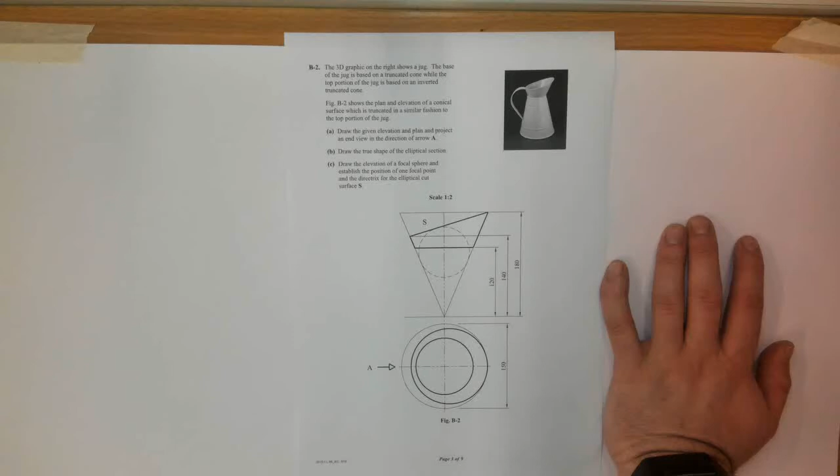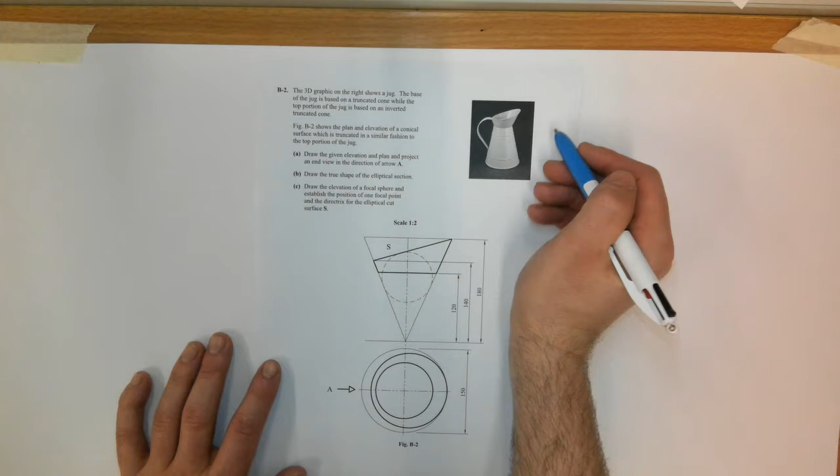Okay, so welcome to the 2015 mock exam on DCG, and it's doing conics, right? So we have a 3D graphic of a jug. So there's a cone here that's truncated, so the top cut off, and then the top portion is a cone upside down that's truncated there and there. So it's cut at an angle, cut horizontally.

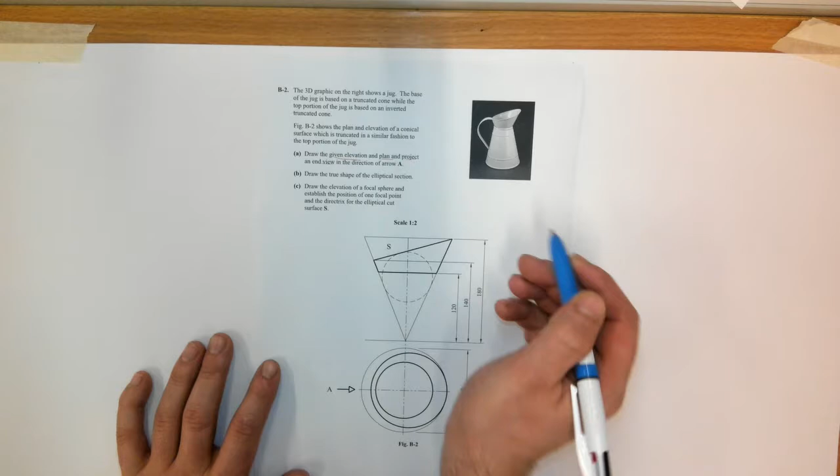So B2 shows a plan and elevation of a conical surface which is truncated in a similar fashion to the top portion. Part A. Draw the given elevation and plan and project an end view in the direction of arrow A. So if the end view or the end elevation is done this way, the end elevation will be drawn on the right of the elevation.

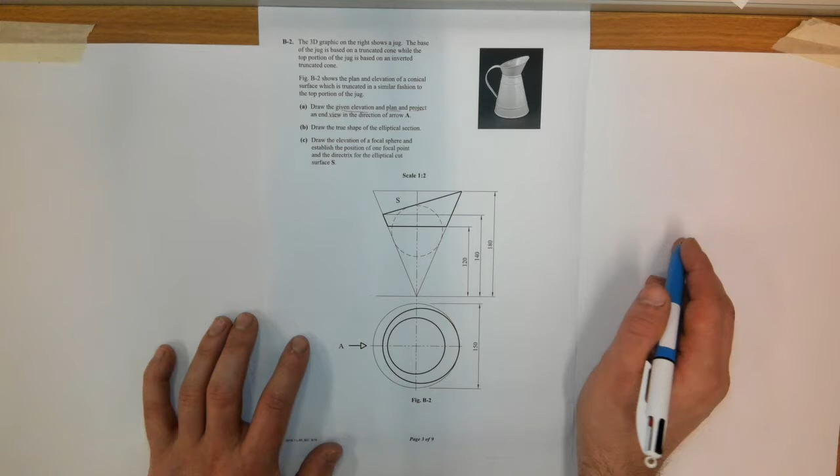Now what's important to note is the black circle here on the inside represents this line here in elevation. It's an edge of the circular surface. If you cut a right circular cone, inverted or upright, any horizontal section will produce a circle. So that's a circle there. Now this is truncated, so in plan that's going to appear as an ellipse.

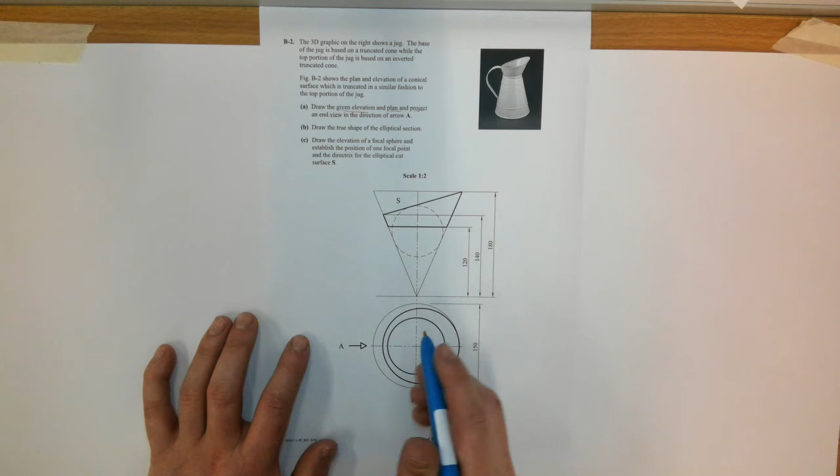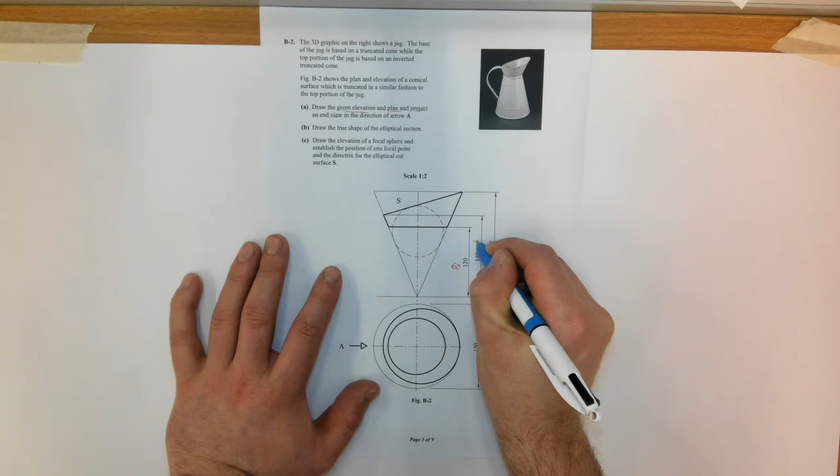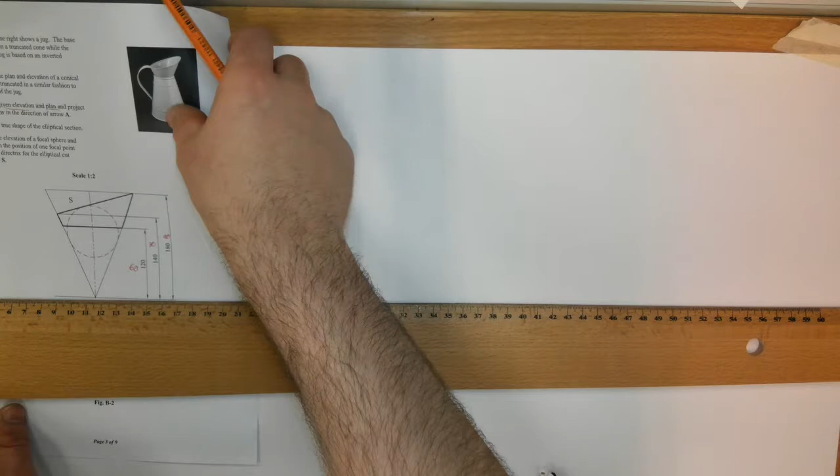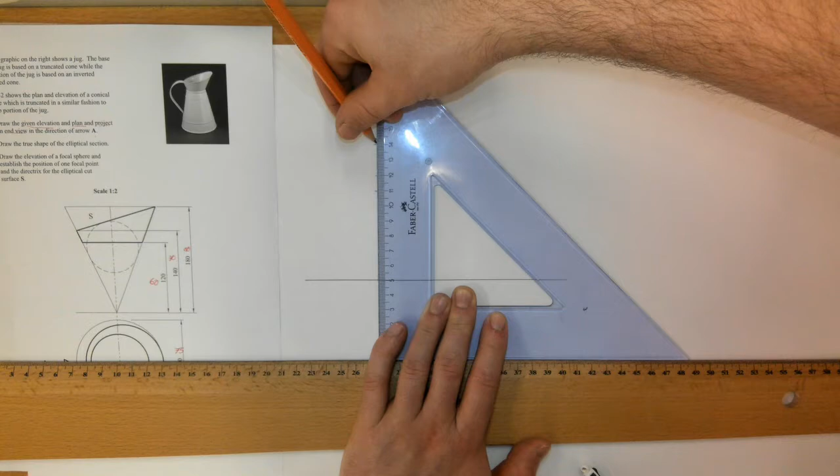So we'll have to draw that, and we'll draw it using elements. So I'm going to get started. A reminder, it's scale 1:2. So 60, 70, 90, 75. Okay, so I'll get my XY line here now. One moment. Okay, so 90 up, this is max height. Then we have 60 up as well. Okay, and then 70 up from the XY line, and center here, there.

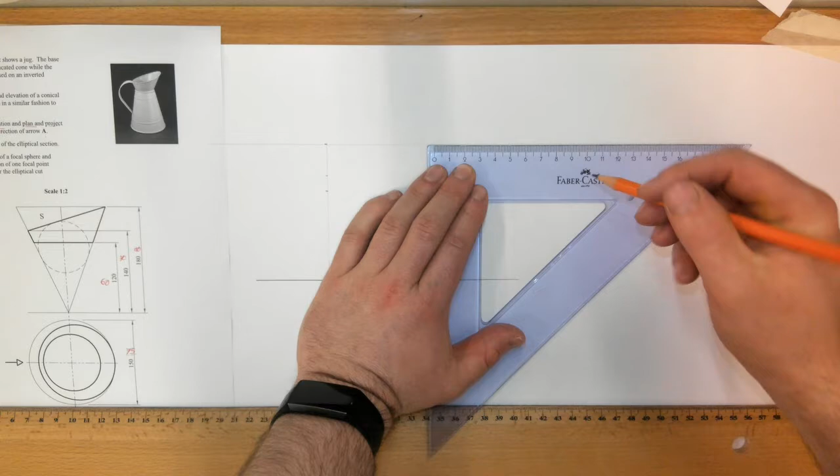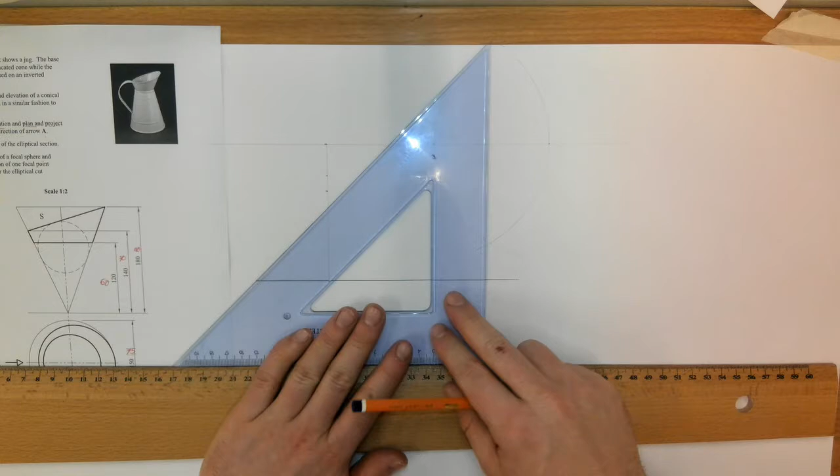Okay, so I can go across. It says in plan that the diameter is 150, so that's 75 after the scale. So how am I going to get that stepped equally? So I'm going to just on a light line mark 75. I'm going to take my compass, set my compass to the length of the line and bisect it. So it's just light construction work. So there's half of this 75 there. So I can take that and step it either side. Now I can get to business.

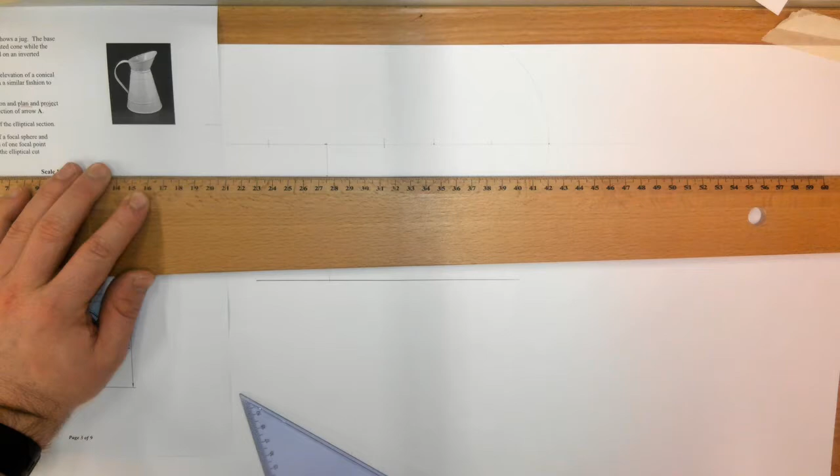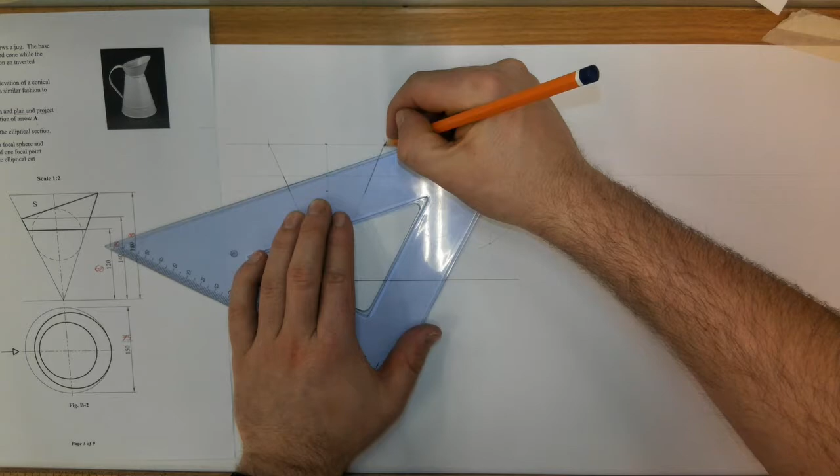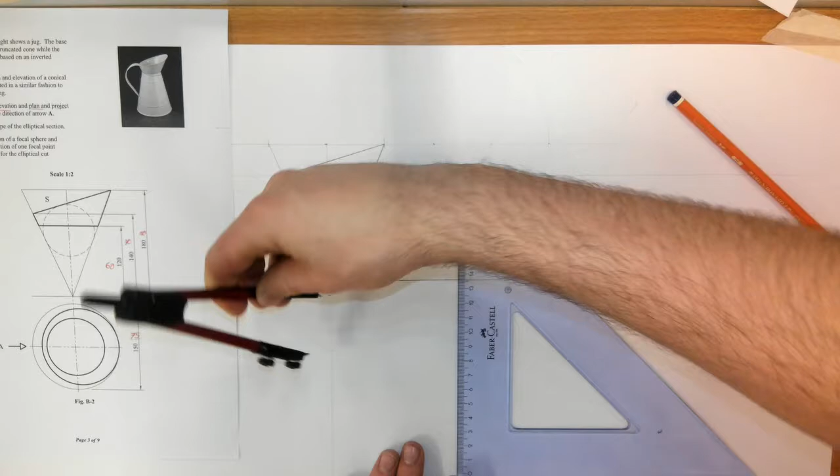So I'm just going to draw a light line here, take my set square now, join these points together. Same then over here. Connect then these here. Connect those. Now, the plan view. So there I can start my plan view. So I'm drawing in the outline of the cone. Now to get the inside black circle, I'm going to bring my compass up here, take the distance there, bring it down here, and that's the radius of the circle in plan.

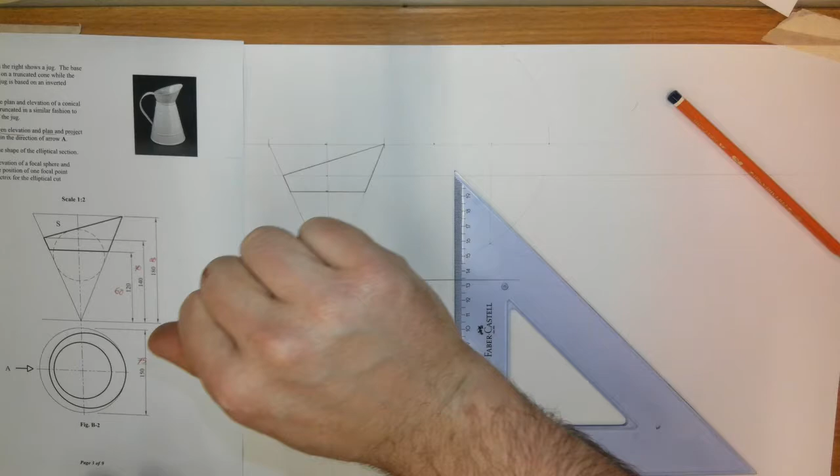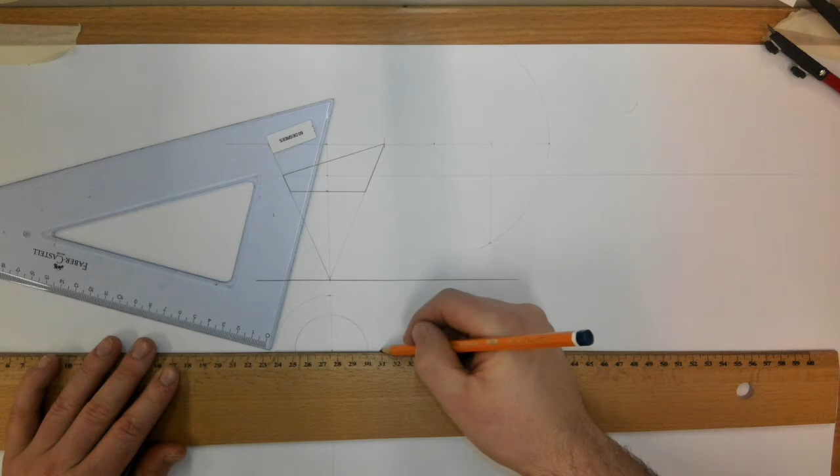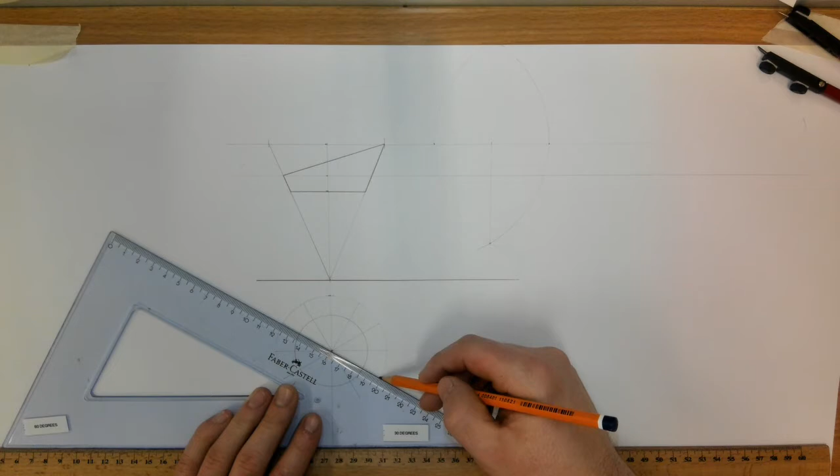Right. Now I need to get the elliptical section here in plan. So what I'm going to have to do is divide my cone up in plan into elements. Okay, now 0, 1, 2, 3, 4, 5, 6, 7, 8, 9, 10, 11. Right, so let's bring them up to elevation.

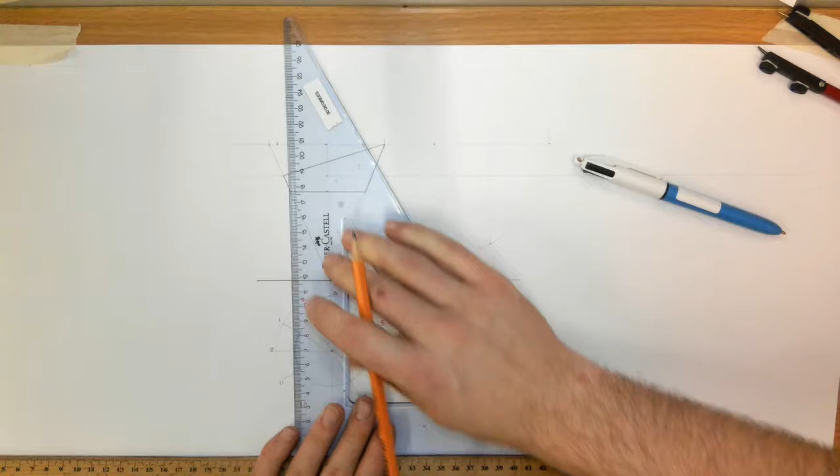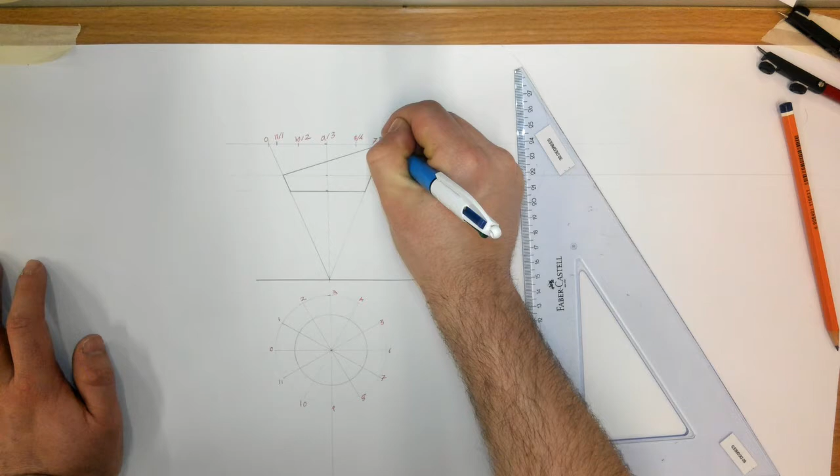So I'm marking those points in elevation, and they're going on the base of the cone, so the top essentially. And then I'm going to label them 0, 11/1, 10/2, 9/3, 8/4, 7/5. Okay, if they join to the apex in plan, they join to the apex in every view. So I'm going to join them lightly to the apex.

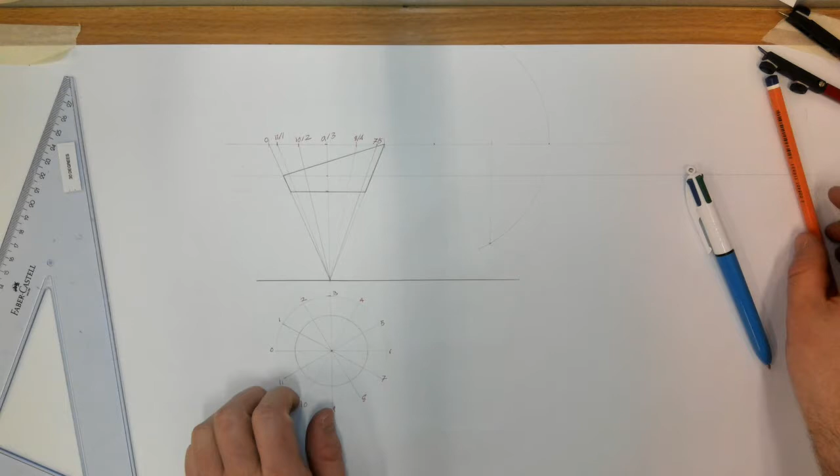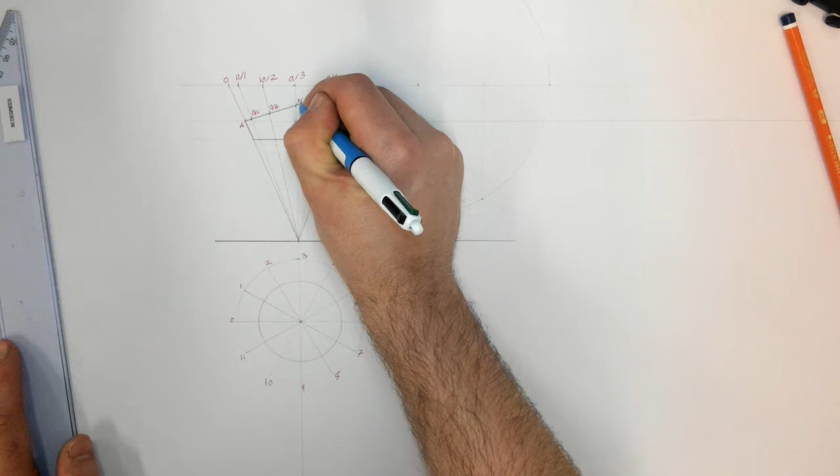Now, where these generators cut the cone, that's points on the elliptical cut surface. Okay, so here we have a point there A, then we have B and C, D and E, F and G, H and I, J and K, and L. So we need to bring those points down to plan, right?

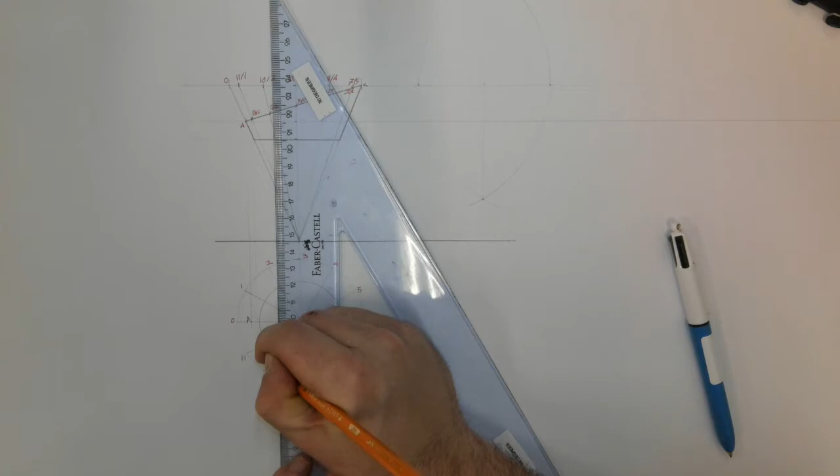So A is on the line 0 to the apex, so there's point A. B and C are on the lines 11 to the apex and 1 to the apex, so there's B and C. D and E are on the lines 10 and 2, so that's D, that's E. Okay, F and G now are going to be hard to get, so what we're going to use is a horizontal section, right?

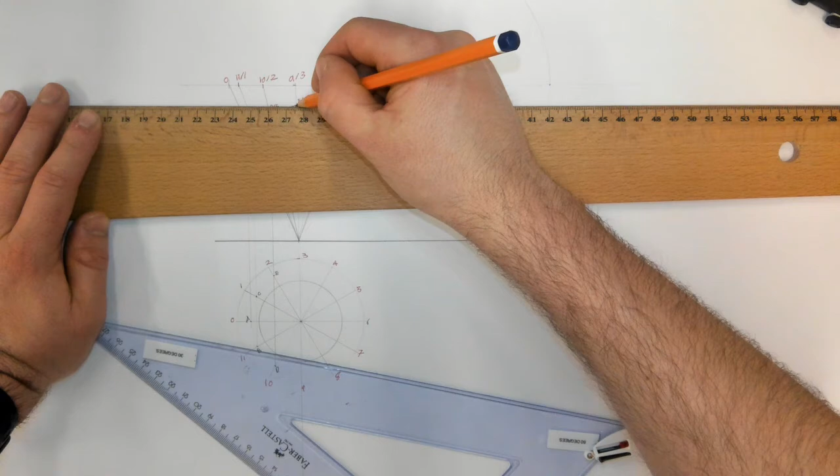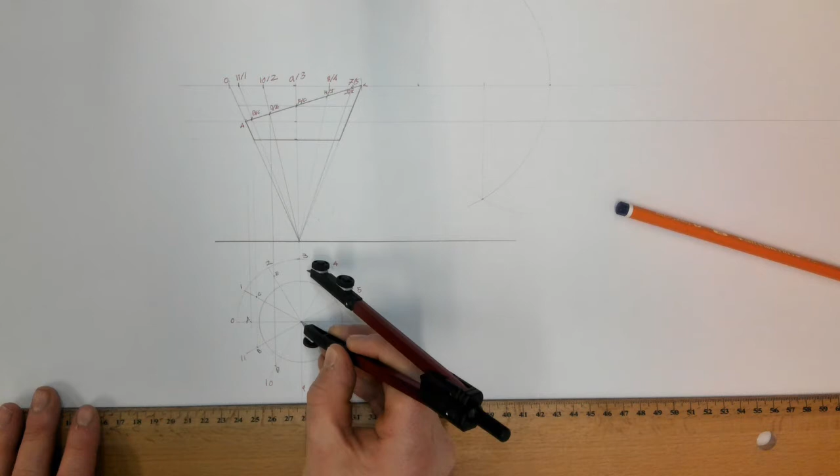Horizontal sections of a right base cone, whether it's upright or inverted, produce circles. So if I draw a horizontal line there cutting through the cone, it's going to produce a circle. So if I take my compass here now, having set to that radius, there's going to be G and there's F.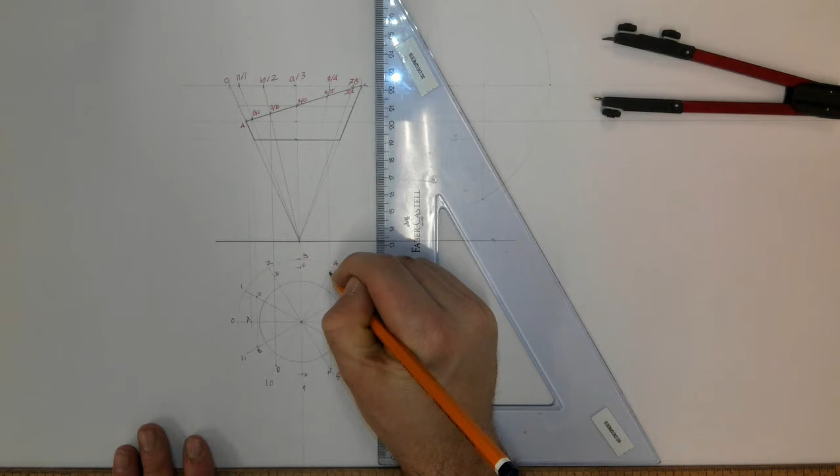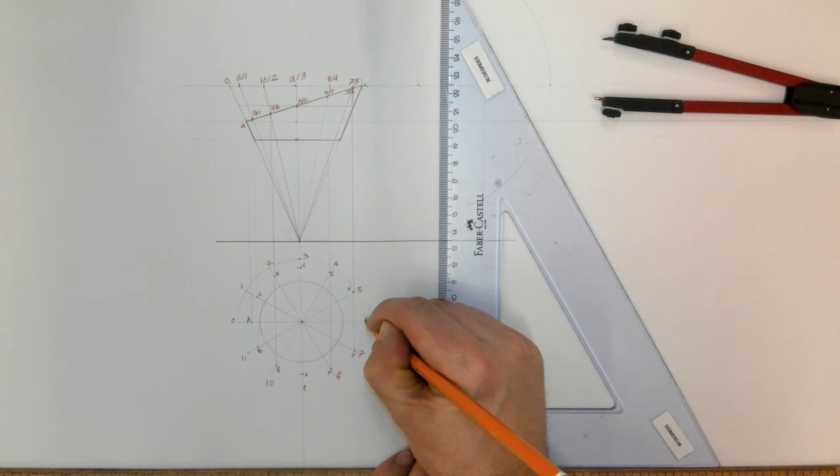Now we want to get H. H is on the line 8 to the apex, and I is on the line 4 to the apex, so 4 to the center. Now J and K, so there's J and there's K, and then point L is there. Right, we can freehand sketch them in, but I'm going to sketch it in later.

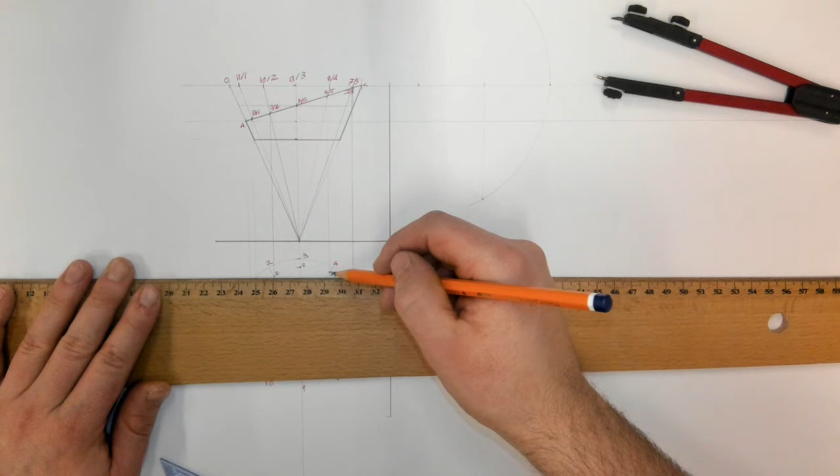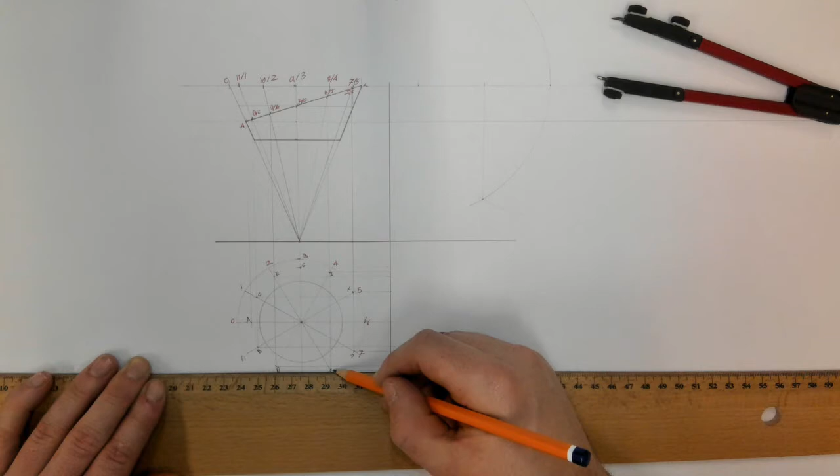So what I need to do next is I need to draw the end view. So I'm going to draw a vertical line here for the YY line. I'm going to bring each of the points across. So all the letters, bring it across until it hits the YY line. Now, where it hits the YY line, we can do our 45 degrees.

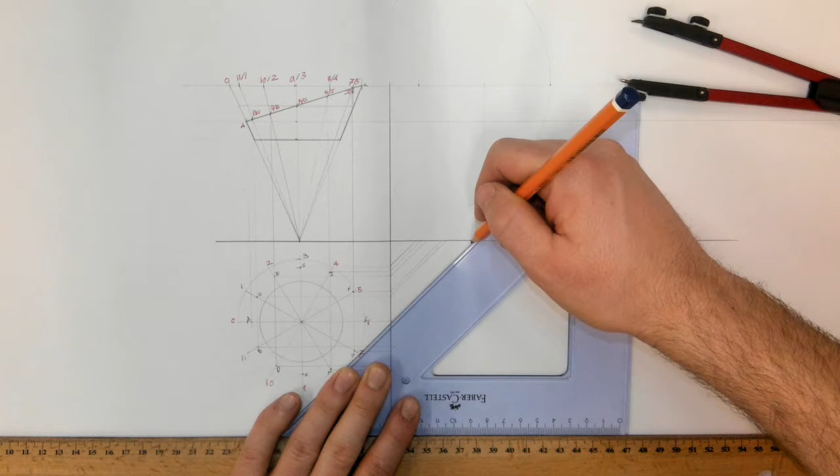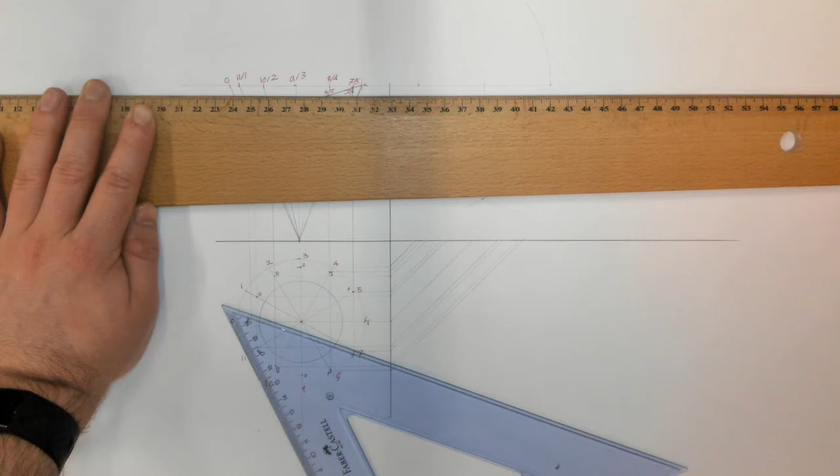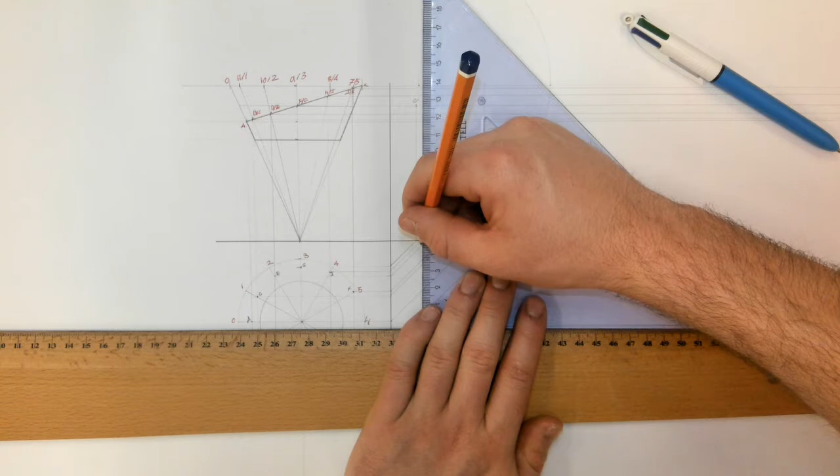Now I'm going to bring all these lines straight up in a moment's time. But first I'll just bring the points from elevation across. So the letters in elevation, just bring them straight across. Okay, I'm going to bring up point G. So there's G. I'm going to bring up point I. There's I. Okay, I'm going to bring up point E. There's E. You've got to be careful that you label these right.

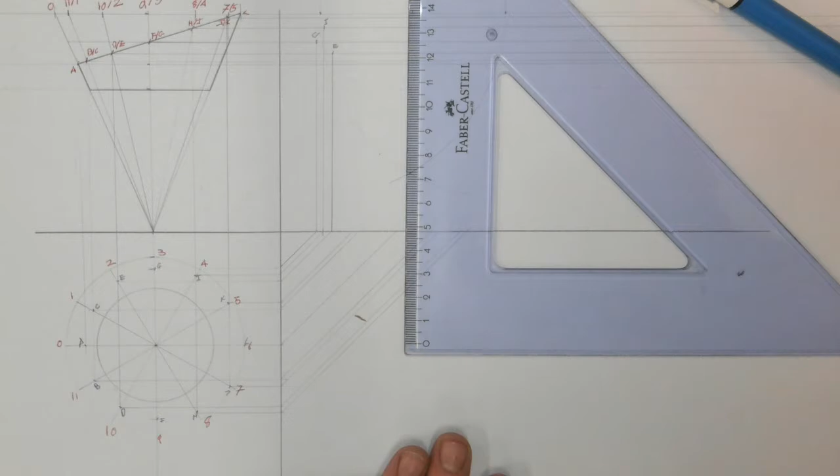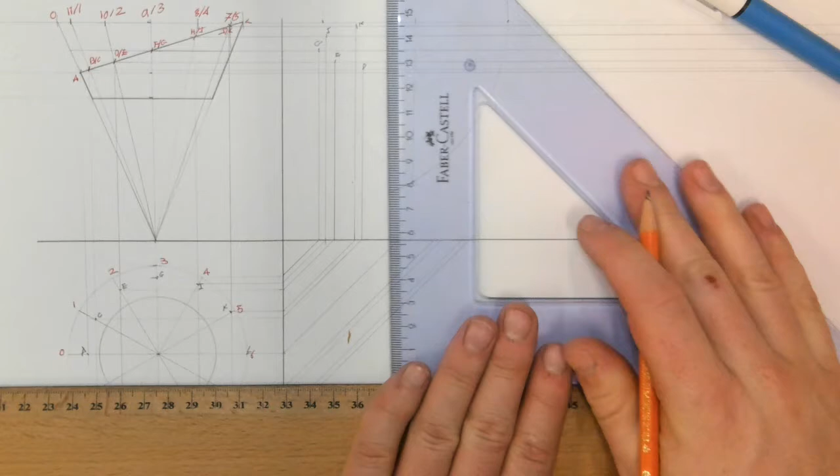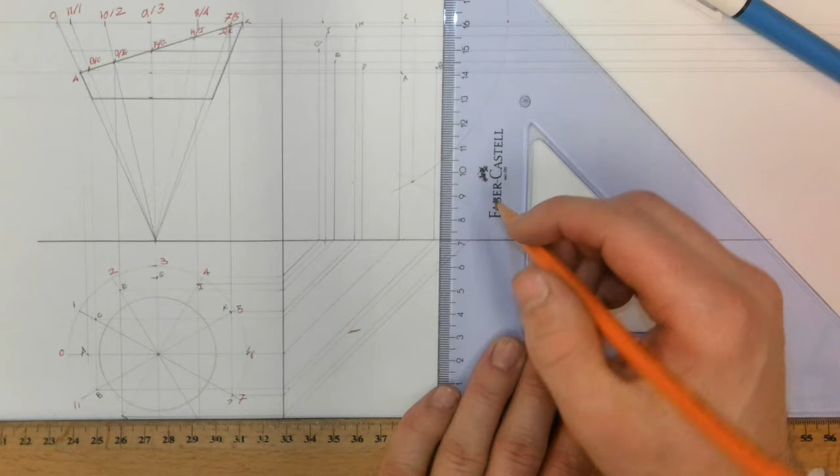Now I'll zoom in a little bit. So point K. There's K. So there's A and, not point C, A and L. There's point L. Right, then B. Okay, J. So yeah, that was J. Point D.

Point H, over and up. And then point F I have yet to do. So over and up from point, not H, F rather, sorry. So now I have one of my letters in the wrong position, this one here that I labeled. So I need to go down and track it back. So that was point D. D should have been, that's D there. And then this is point F.

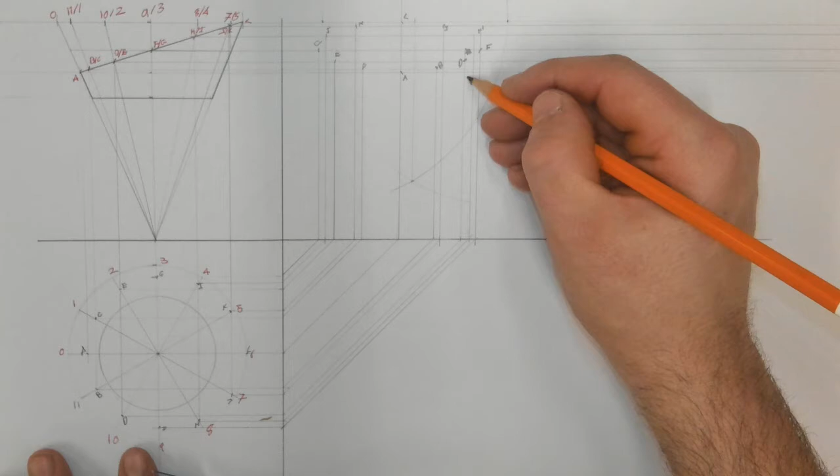Okay, and do I need any other points? Good, then I have I, H. Need to do H, forgot to do H. So up, across there, and then here's point H. Right, I'm going to pause the video and sketch all of these in a moment's time.

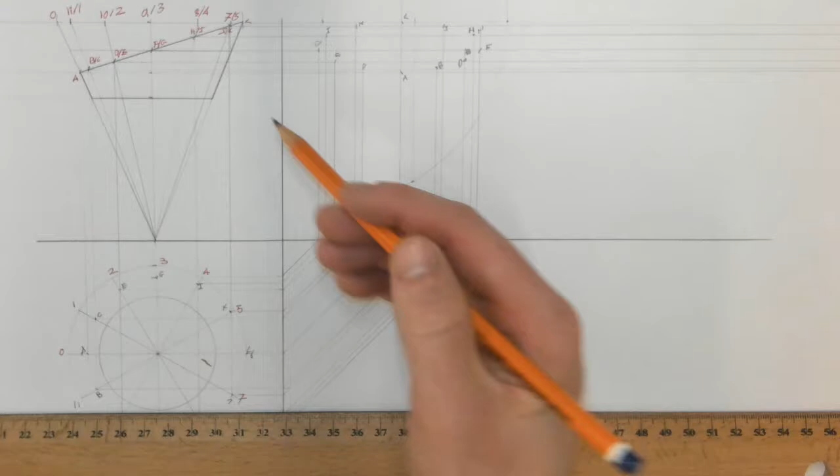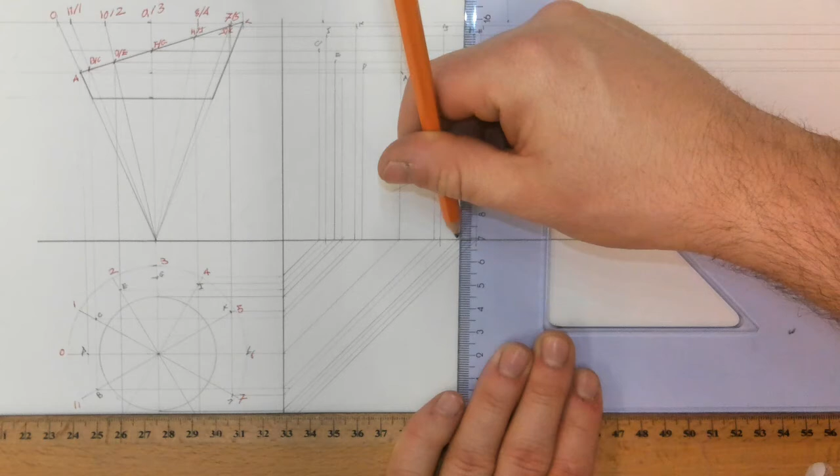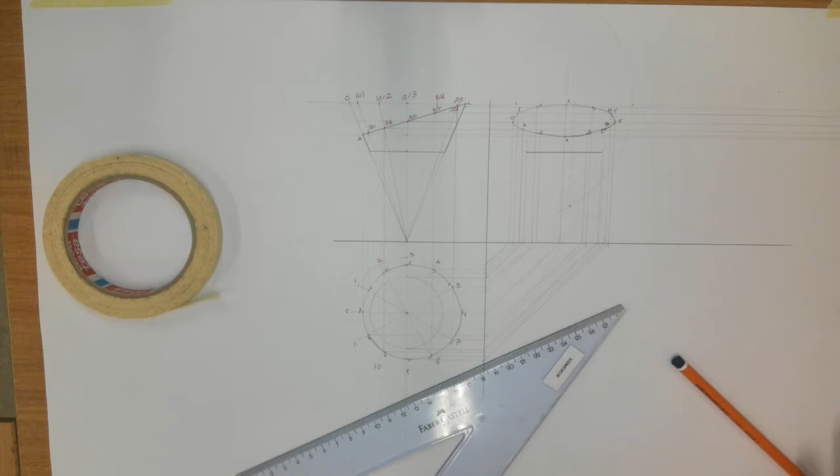Now just to do this bottom here, I'm going to bring the circle across the XY line, up, and same here. So up from it. There we go. They'll be heavy in between them. Now I'm going to pause and sketch them in. So I have them sketched in, and I need to join G to this point here and F to this point here. Now the next part of the question says draw the true shape of the elliptical section.

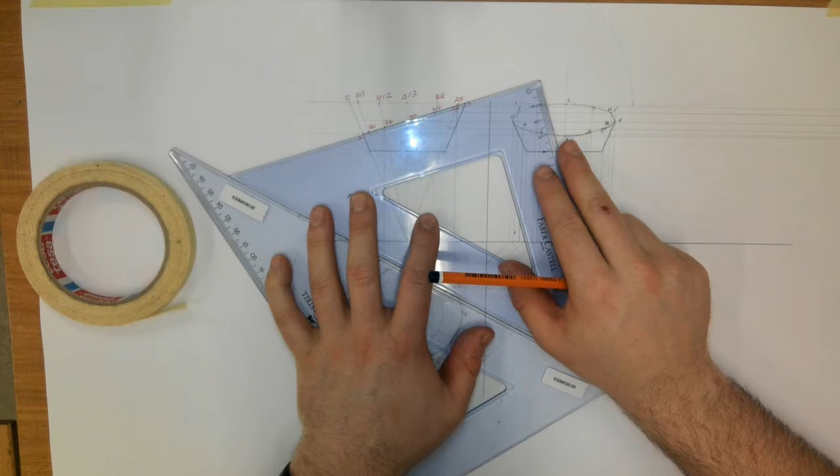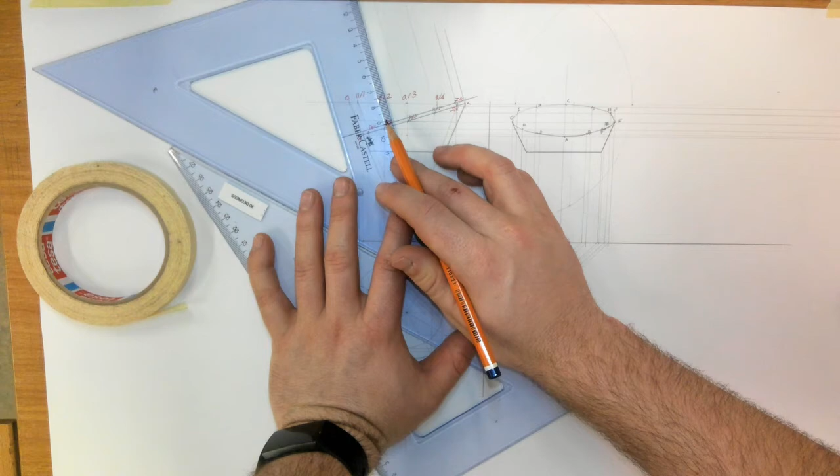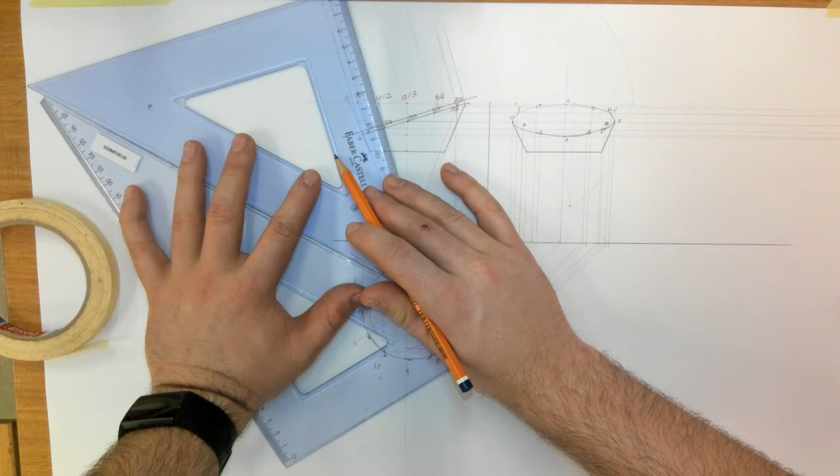So I'm going to look perpendicular to the edge of the elliptical section. It'll be tight for space here, and I'm going to draw in my X1Y1 line right here, very close to it. Now I'm going to project perpendicular to the X1Y1 line from each of the points. This is essentially an auxiliary plan because it's projected from the elevation, and I'm going to take my distances from the X1Y1 line down to plan. Okay, so I can get started on that.

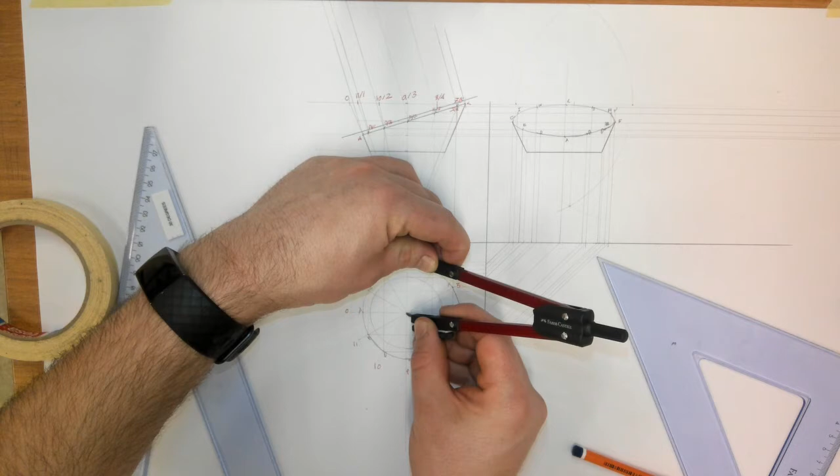Right, now, because I'm tight for space, I'm going to draw a datum line. So I'm just going to draw a line parallel to the XY line that serves as a datum to take my distances back. For an auxiliary plan, you go from the XY line down to plan. As I said, I'm short for space, so I'm just moving my compass. I'm going for speed, so I'm going to put the compass onto the center line and find the axis. This allows you to pick up the pace.

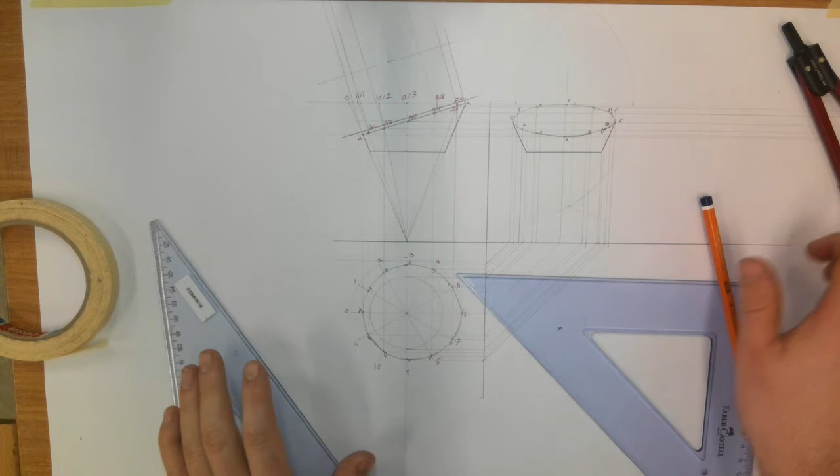And then point A is going to be on that axis. So there's A. Point L is going to be on that axis as well. Then for C and B, I can put my compass on the axis. C and B are going to be the same. So there's C and B.

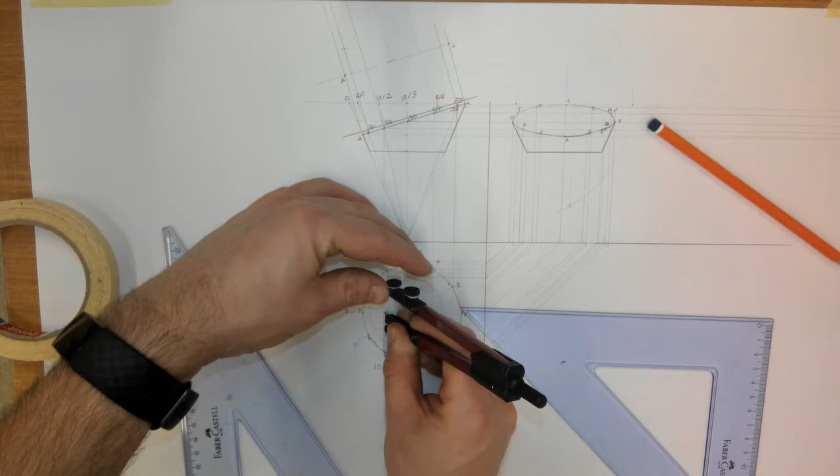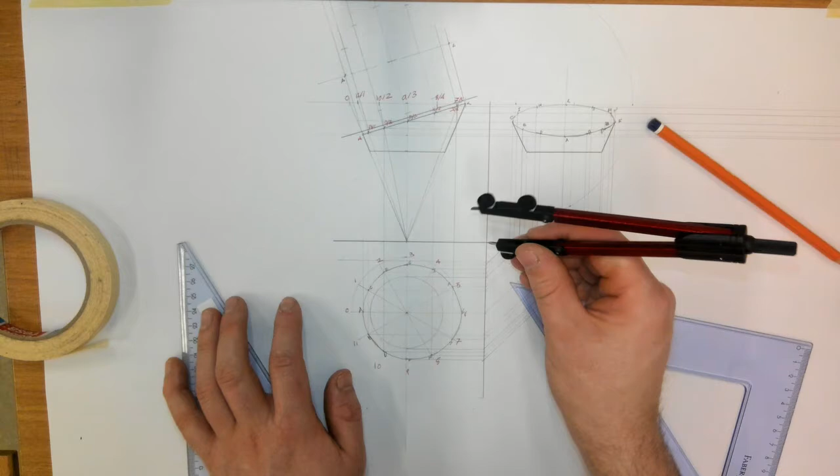D and E are the same. So I can mark it in there. G and F are the same. Okay, I and H are the same. Compass on the axis, bring it to the axis up here and mark it in. It's the same thing as putting your compass on the datum line and moving them to each point. It's just quicker, that's all. And then J and K.

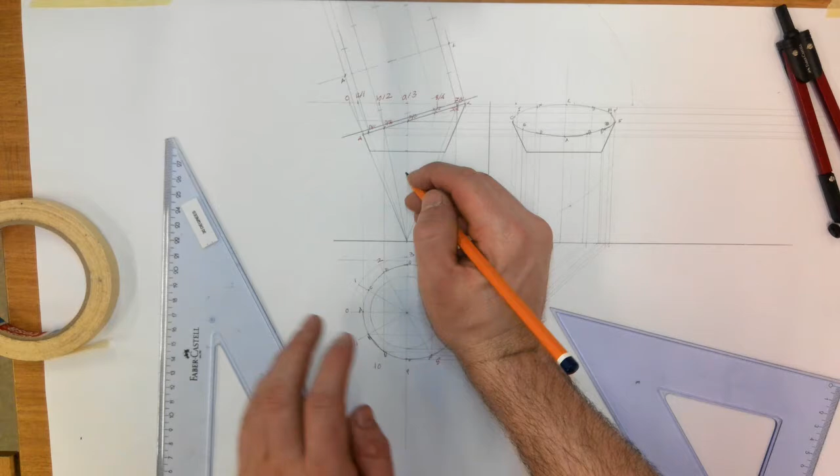Right, so I shall freehand sketch them in a short while. So the true shape will be up there. I'll freehand sketch all the points in a moment. Right, the next part of the question says, draw the elevation of a focal sphere and establish the position of one of the focal points and the directrix of the elliptical cut surface S.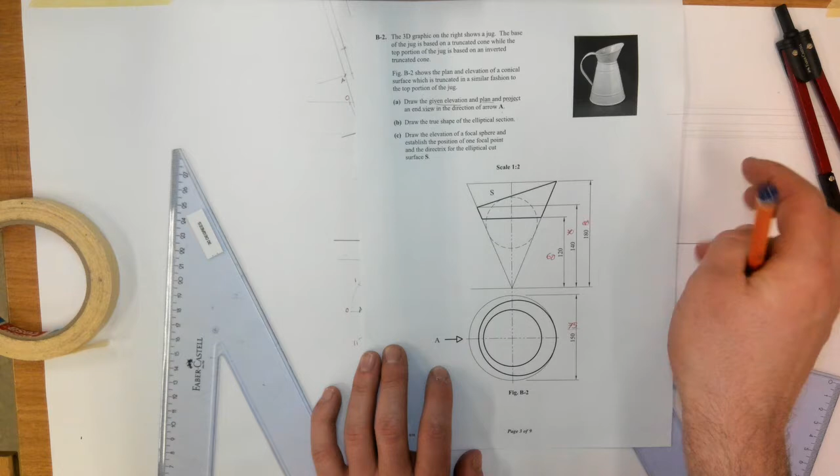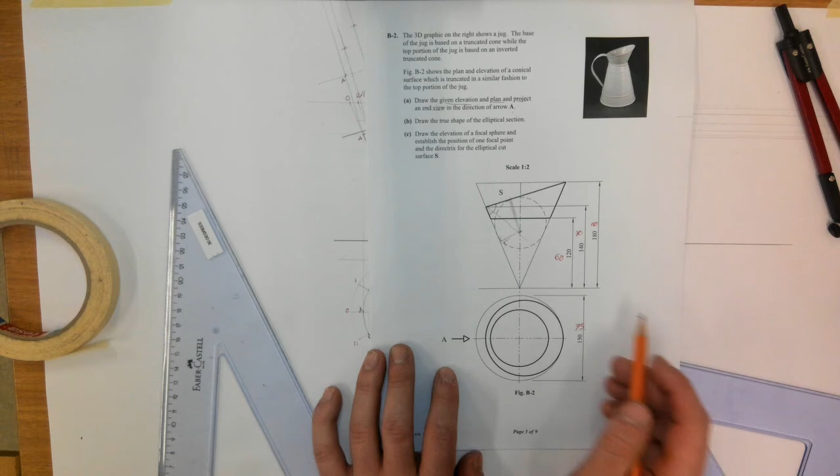So draw the elevation of a focal sphere. The sphere is a tangent to the extreme generator and the cut surface. So I have to bisect that angle until it hits the center line and go perpendicular to the extreme generator to get the radius. The focal point will be where the sphere is a tangent to the cut surface. The directrix is a horizontal line passed through the point of contact between the sphere and the cone, and the cut surface brought down until they intersect.

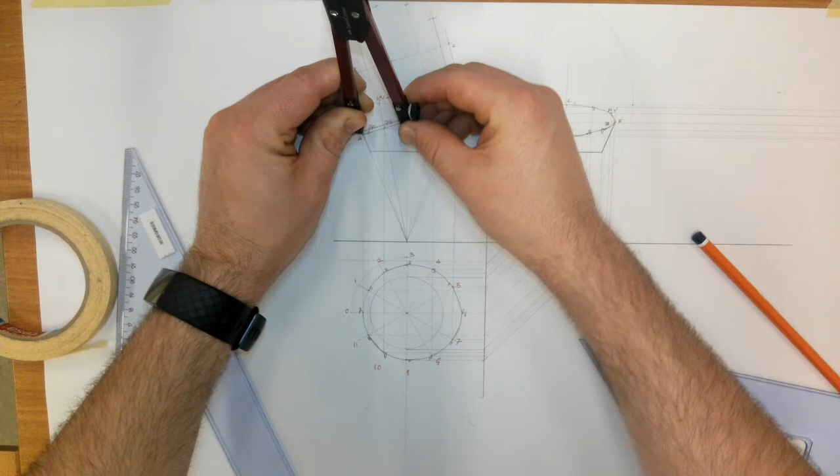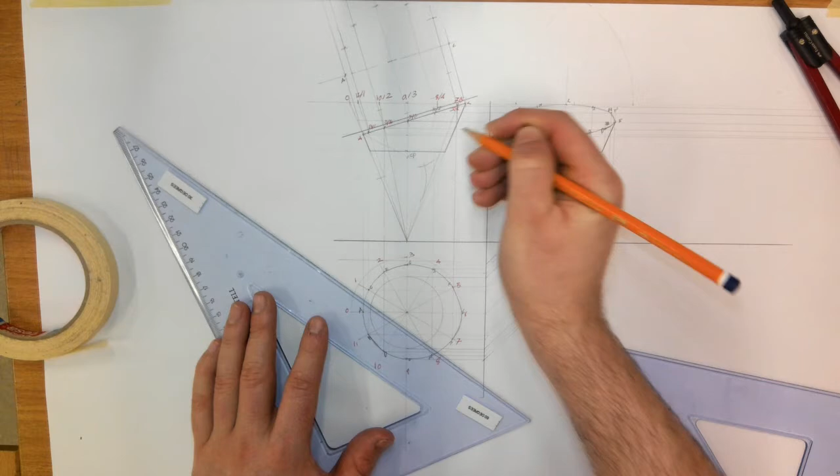Right, so I'm going to take my compass here. I'm going to bisect this angle. So I'm bisecting the angle of the cone. So just to clarify, I'm bisecting this angle here. Now, there's the center point of the focal sphere. If I want to get the radius, I'm going to take my set square, line it up with the extreme generator, slide it along to the center point, and there's the point of contact. Right.

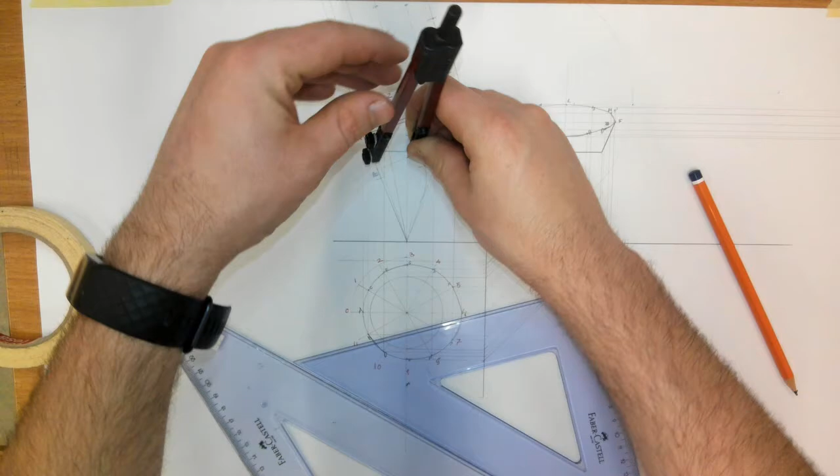Here's the sphere now. There. Yeah, I'm a bit off there. I'm going to pause that and fix that. So fix that sphere. Right.

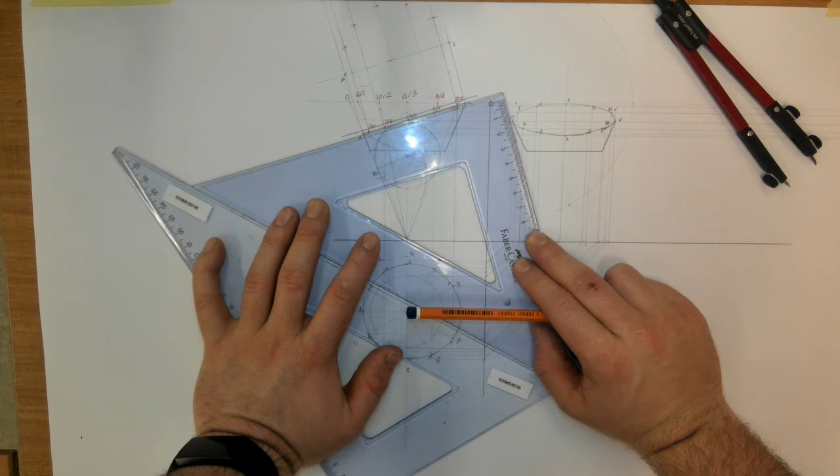So to get the focal point, we're going to line our set square up with the cut surface, and we're going to draw a line 90 degrees to the cut surface from the center point. Now there's the point of contact between the cut surface and the sphere. So if you bring this point up here, that's the focal point there. So that's the focal point between the sphere and the cut surface.

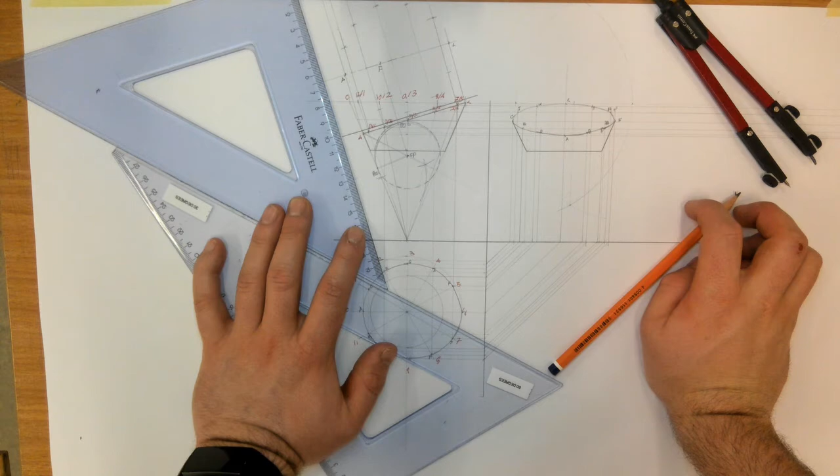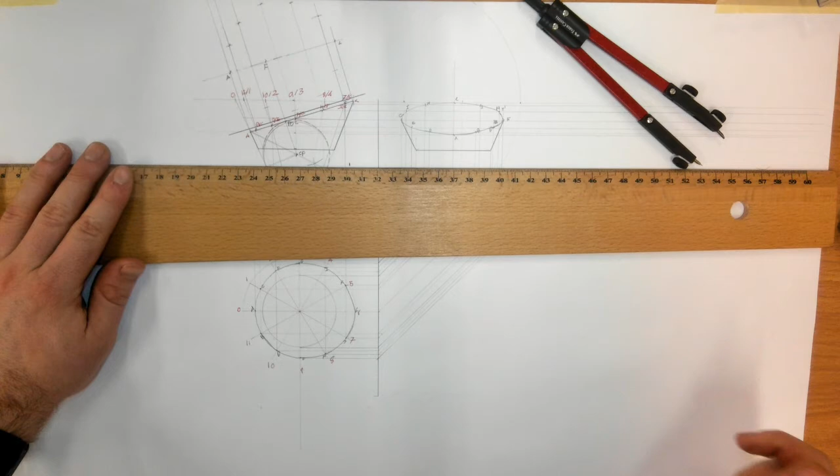Right, the next thing to do now is we're going to have to find the directrix. So the directrix is the line of intersection between a horizontal plane that passes through the point of contact between this focal sphere and the extreme generator of the cone. So we can just run it along there. And then the cut surface is extended on down. Okay, and where they intersect is a point view of the directrix.

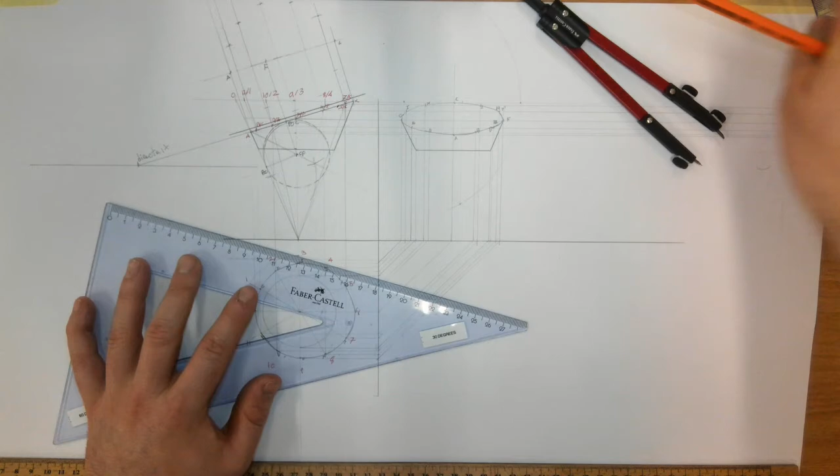And then we can bring that line back out. We can project that back up towards our true shape. That's our directrix there. So this directrix.

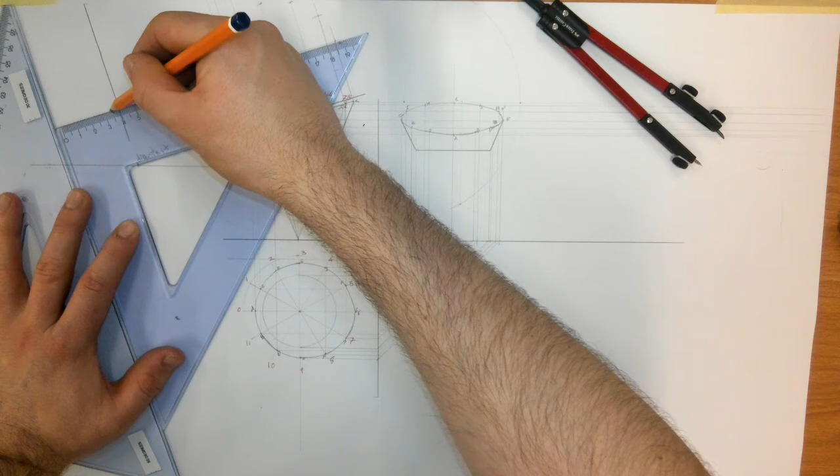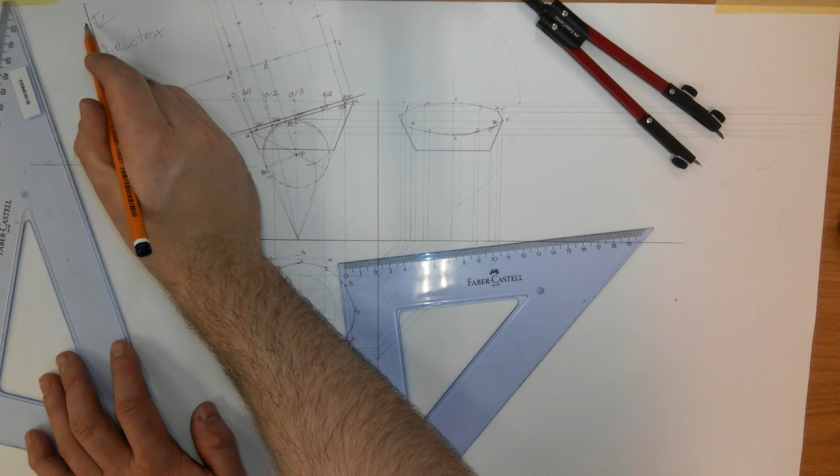Now, I'd love a question where they asked, find the dihedral angle between the cut surface of the cone and the horizontal plane that passes through the point of contact between the sphere and the extreme generator of the cone. And the dihedral angle will be right there because both planes appear as an edge. There's a line of intersection between the planes, true length there, point view there, so both surfaces do appear as an edge.

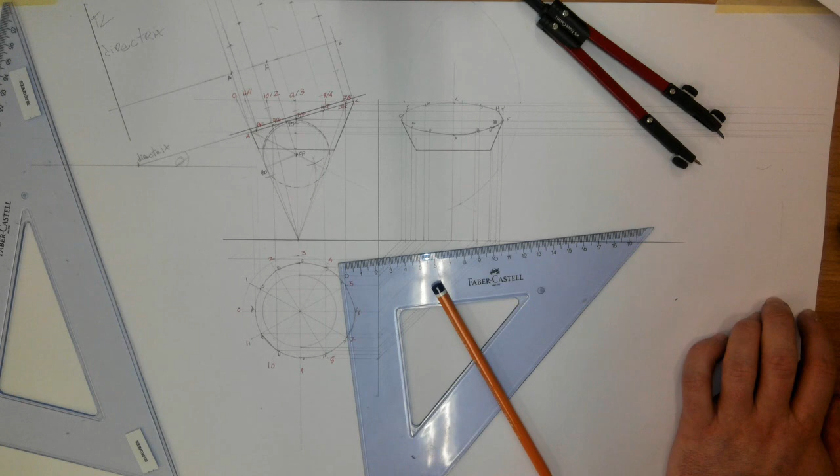Sorry, I forgot to sketch in the points there, which I'll do now. So I'm just going to pause and sketch it in. So that's what it looks like when it's done.